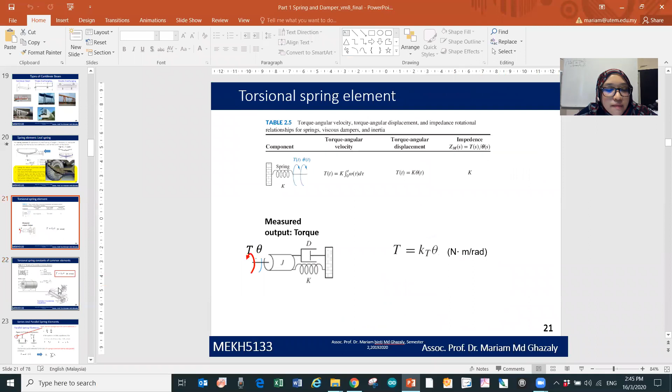Okay, welcome back. Okay, 6 students, any more? 3 more students. Not in yet. Who's here? Zamzame, Sadiq, Ain, Arif.

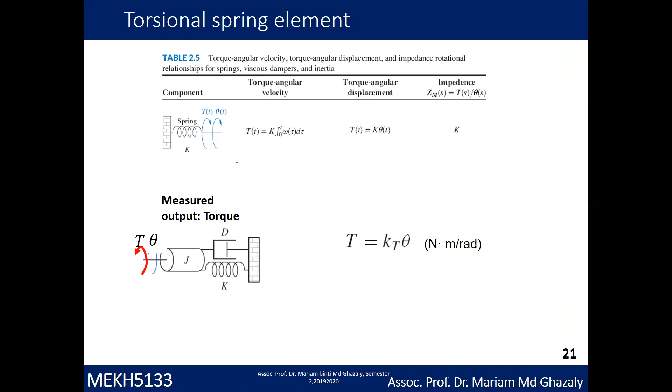Okay, torsional means the rotational part of the spring element. So you have the spring, but you're going to rotate it. So according to the table just now, you have the spring. You can get the torque value, which is equivalent to the K of the spring times the angle.

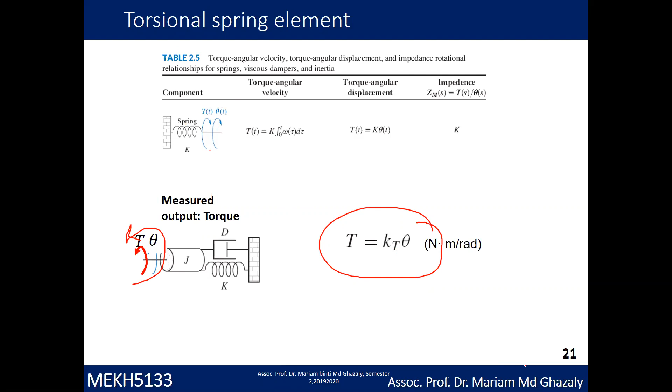And then for this one is the common torsional spring constant. Supposedly, as you know, the normal equation is T equal to K theta. But for the case of a coil spring, you use this equation. So KT is equal to E, the elasticity of the material, D to the power of 4, D is this diameter, over 64 N D. Okay, so this is the common equation. Of course, you can try to derive it if you want, but no need, okay? Because we have a lot of things to derive later when you do the dynamic system.

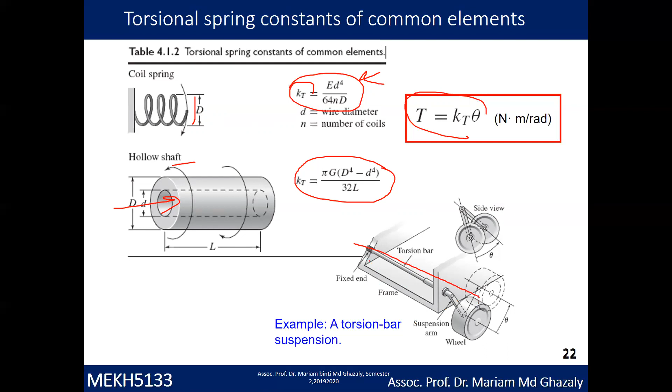And then for the case of a hollow shaft, meaning you have a shaft that is hollow inside, okay, you are given by this KT value, right? So where do you use this hollow shaft? Example, in a torsion bar suspension system. So you have the hollow shaft here, right? So next we go to...

...the series and parallel spring element. Okay, so we go through the first part, which is the parallel spring element. So we start with the modeling of the spring, without the mass value, right? So you have force here. Okay, you're going to give the spring force, and there are two springs connected in parallel. So you have spring with K1 and spring with K2. So the equivalent is that you have force and KE value, which is the equivalent of these two springs. Okay, so note here that the parallel springs have the same deflection X.

So either way, if you have two springs like this, okay, you push it downward, you will have the same deflection X. Okay, so it means you can derive the X value using the equation F equal to Kx. So you get X equal to F1 over K1, which is equal to F2 over K2, because X is the same here. Okay, so if the system is at static equilibrium, then you have F equal to F1 plus F2.

Okay, meaning you have two forces, which is the summation of F1 and F2. So you derive it here and get K1 plus K2 in brackets, times X. So therefore, you can calculate KE, which is K1 plus K2. Meaning that if you have two springs in parallel, you can directly calculate KE as K1 plus K2. So if you have three springs, 1, 2, 3, then KE equivalent is K1 plus K2 plus K3.

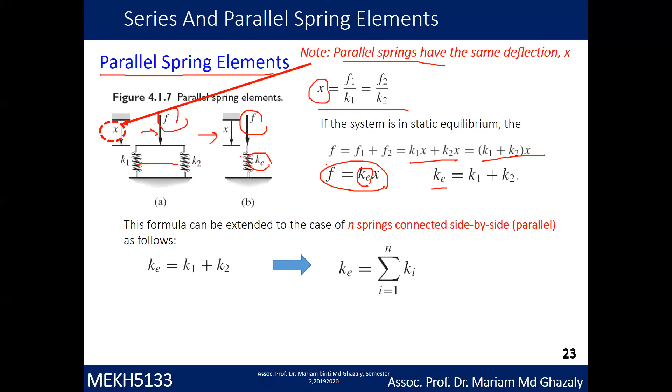In contrast, if you have a series of spring elements, like two springs connected in series, and you push it while one end is fixed, the spring will deflect and shorten by X. Note that springs in series have the same force value, so the force given to both springs is the same.

Therefore we can write X equivalent to XA, which is for K1, plus XB, which is for K2 deflection, assuming that XA and XB are not the same deflection.

If the system is in static equilibrium, we can write X equal to X1. What is XA? XA here is F, same F value, over K1, plus XB, which is F over K2.

So if you organize the equation again, you get 1 over KE. The K value, 1 over KE, equals 1 over K1 plus 1 over K2. This means for springs in series like this, you can get the equivalent equation using this formula.

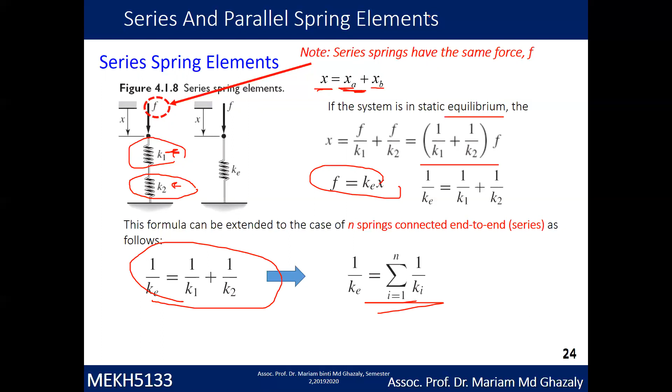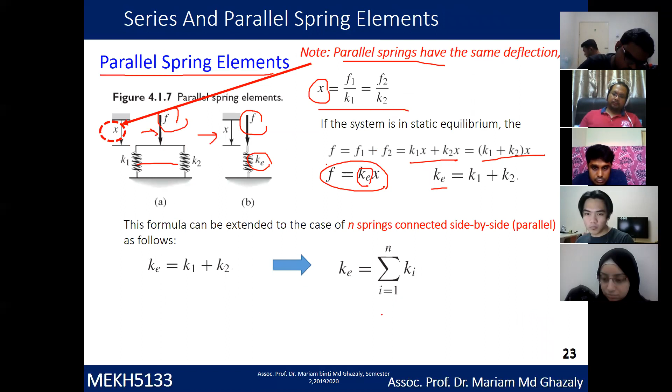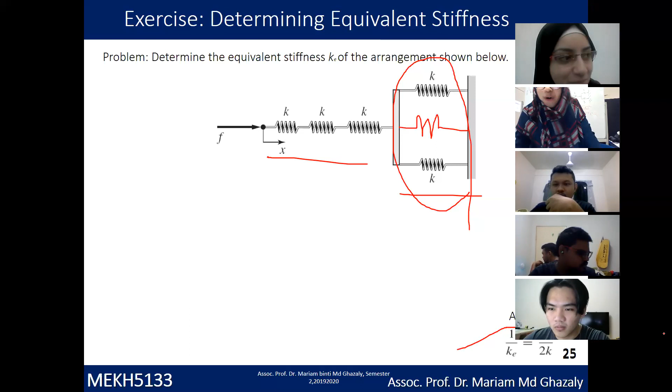What? Anyone? I heard a lot of voices. Anyone talking there? No, I'm just in the library and there's many people. Oh, in the library, alright, okay.

Alright, so first get the equivalent here for the parallel springs - you get KE here, which is 2K. So I draw this again: K, K, K in series, and then you have this K equivalent here, 2K. Now you can see that all this spring is in series.

So by having that, you already know based on the previous equation that 1 over KE is the summation of 1 over K. So you have 1 over KE equal to 1 over K plus 1 over K plus 1 over K plus 1 over 2K.

So you get 7 over 2K. So this is the answer. Of course, if you want to get what is KE, then KE is 2K over 7. Alright, so everybody okay?

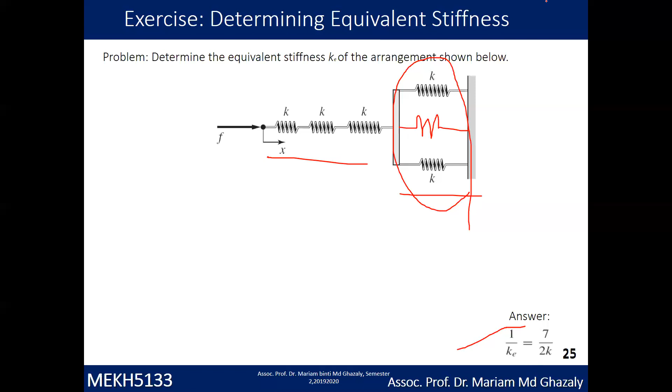Next, we go to this one. Determine the expression for the equivalent torsional spring constant for the stepped shaft shown below. You already learned in the previous slide that even a shaft is actually a spring, a torsion spring. So find the value for KT equivalent. For this one, just use the same method. This is easy.

Here you have K and K. We take it as K1 and K2. So find what is KTE. Is this series or is it parallel? Series. For series, the equation is 1 over KTE equals 1 over KT1 plus 1 over KT2. So what do you get?

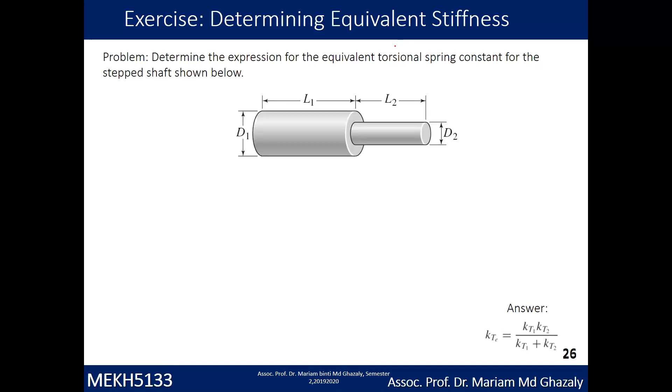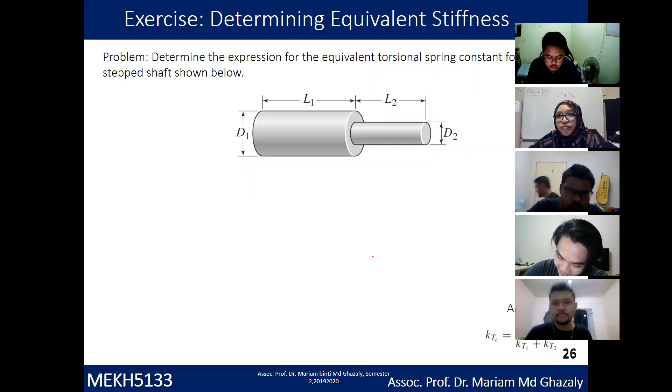Next we go to the modeling of mass and spring. Just now was only spring, so now we are going for mass and spring. Same table as just now. As you learned in last week's class, you can represent the spring force as equivalent to Kx.

Can I please see the solution on the whiteboard? Okay, I just need to write it down. Anyone else have any question? Not bad doing online class. The best part is that I'm sitting. Hiba, okay? Finish? No? Which part you don't understand? Wait a minute. Oh, my writing is very bad. Okay, done.

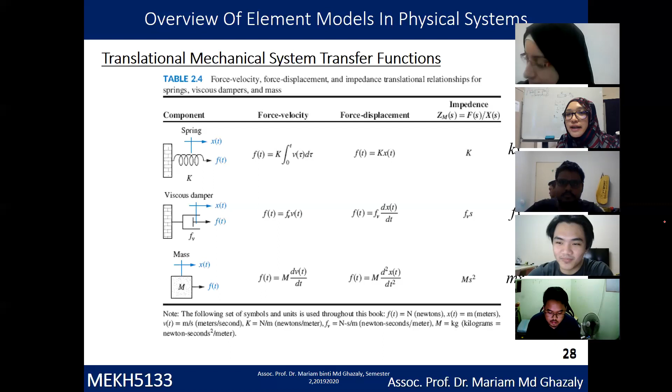The table here shows the value for the spring, f equals Kx. For the damper, f equals fv x dot, which is the differentiation of the displacement, so f equals fv dx over dt. And for mass it is m x double dot, meaning m d squared x over dt squared. We are going to use these terms for easy derivation in the next slides. So let's go to the first example of a mass spring system.

You have mass here. First step is draw the free body diagram. You have M and the K value. Then you have the force at this point, and x is the displacement of the mass. The equation from the free body diagram is M with displacement x(t), so m x double dot plus kx, equivalent to the force. So you get the transfer function for this equation.

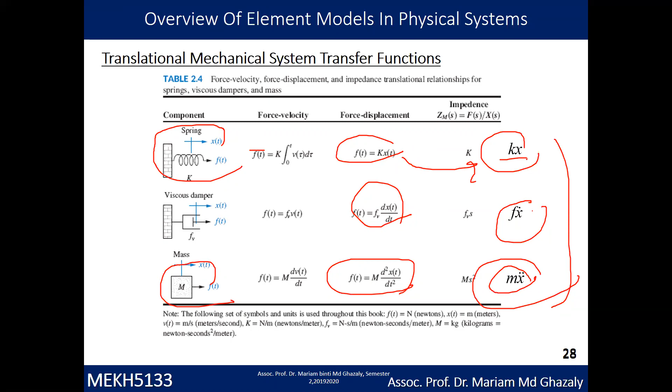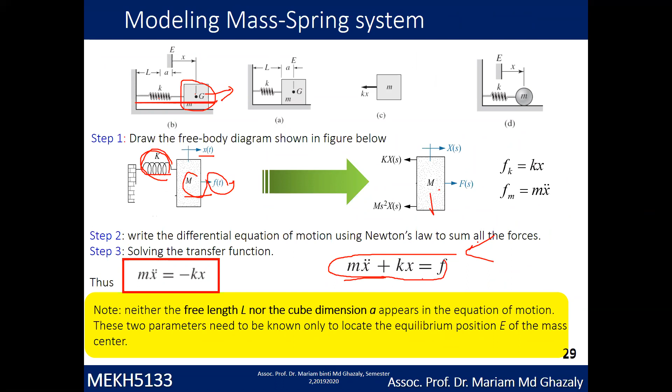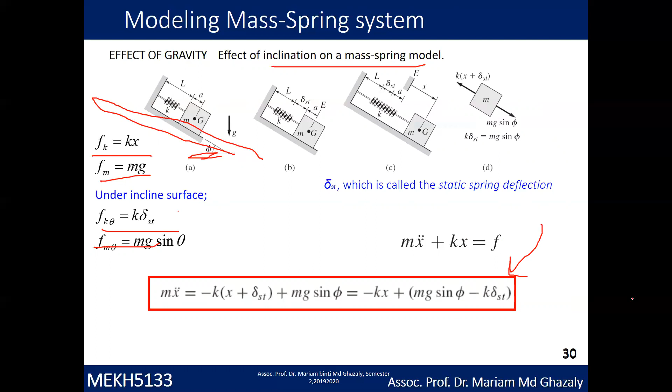Next we go to the static deflection in mass spring. Now it's not on an inclination, it's not horizontal, but it's in the vertical position, like this. Oh, the wrong way. So you have spring, pause. So if you write this out using the same concept as the inclination just now,

you have Fk equal to Kx, Mg equal to Mg. And Fk delta is K delta, meaning the deflection due to gravity there. So you will get Mx double dot equal to minus K(x plus delta st) plus Mg. It's without the theta. Just now you had mg sin theta, now it's only mg, right?

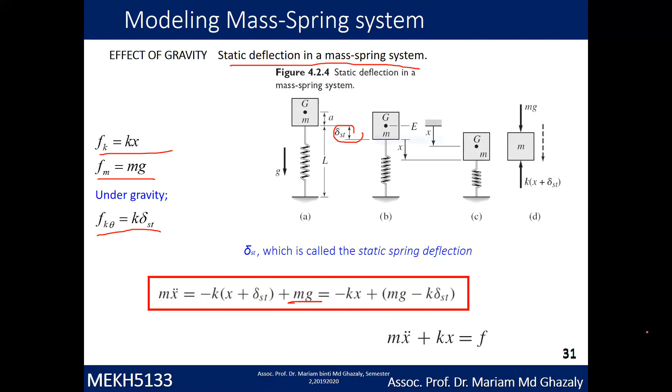So let's go to a real example of beam vibration. You already learned that a fixed beam represents a spring. So this one can be drawn as this free model: you have mass and a spring underneath connected to the fixed part here. The K value for this beam is given by this, which you learned in the previous slide for the fixed beam type.

Assume that the beam mass is negligible compared to M, so that the beam can be modeled as a spring. In reality, the beam itself has a mass, but to represent this model we only take the mass M. So the beam does not have any mass, but we represent it as a spring K. Determine the natural frequency of the oscillation.

You know that when you drive on a flyover, you will feel vibration. So calculate the natural frequency of the oscillation of the system. You know that the period of oscillation is 2 pi over omega n, and omega n is the square root of K over M. Substitute the K value here, then you get omega n for this oscillation.

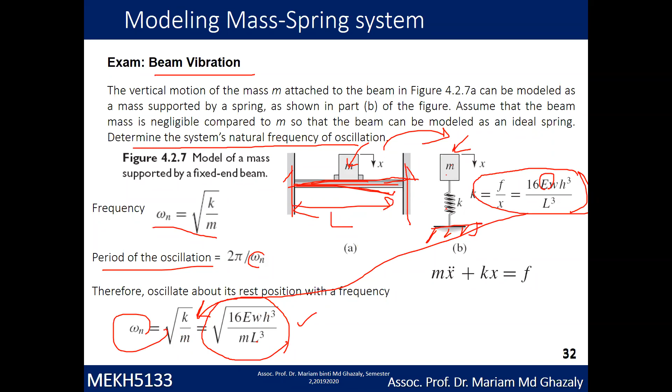Next, we go to the modeling of inertia in rotational mechanical systems. Similar to the linear system, where you have F, for the rotational system the output is T, torque. For the spring, torque is K theta. For the damper, torque is equal to D, the damping value, times d theta over dt, or theta dot. And for inertia, T equals J theta double dot, right?

So let's assume a torsional spring system. You have a mass here, the inertia, and this is the spring. You have learned that a rod actually represents a spring because it will rotate. So we have an inertia and a spring connected to it, represented as this value.

So find the torque T. Use the same concept as when you modeled the linear mass-spring system just now. So T is equal to I theta double dot plus K theta, equal to torque. How you get that is: you have a mass connected to the spring.

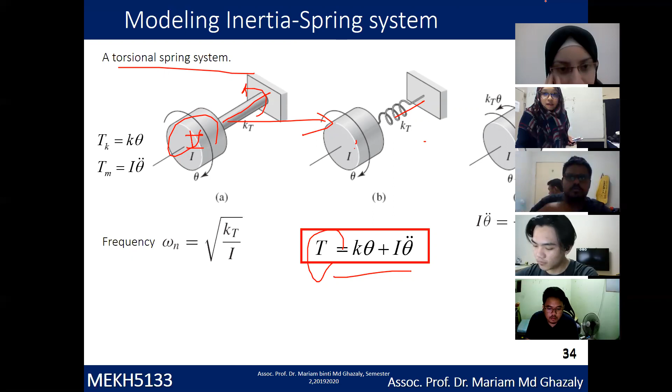Okay, so you have this one inertia and this one is the spring. This is representative. Okay, so you have the torque. Find what is T. Okay, similar to the mass just now. Start with I value. So I theta, when you have torque, when you twist it, then you have a degree of angle. Okay, theta. So I theta double dot.

So where can you use it? So you have inertia here. Inertia. Oh sorry, this is wrong. I typed wrong. I theta dot. This is I, not M. I theta double dot. So you get I theta dot. What else is connected to the inertia?

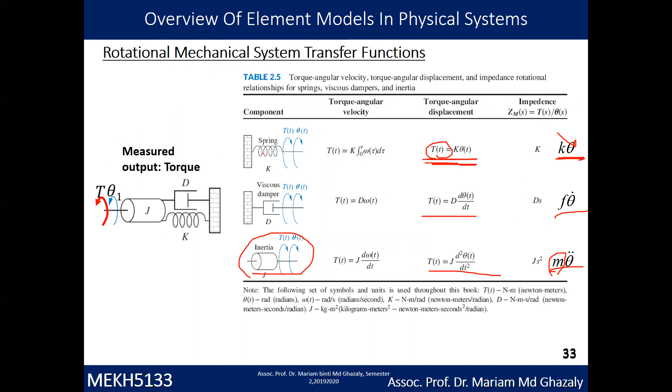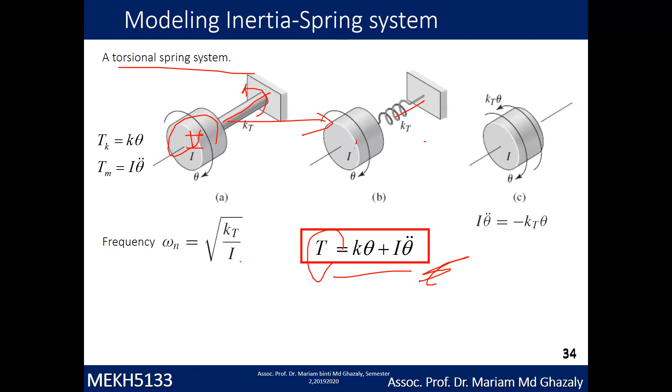K value, K theta. So you see here you have K theta for spring value. Okay. And equivalent to the output. The output is the torque value. So equivalent to T. So that's why you get this equation. Right? So here is just to give the frequency, omega n, which is given by kT over I.

And this one is an example of cylinder on an incline. So it's similar to what I explained just now. When you have a mass system, a linear system on inclined motion, then you can actually get the equation as this one. Okay, so you have the mg sin theta at this part, and then you have mg cos theta at this part, moving to this part. So that's why when you write out the differential equation, you can get this equation.

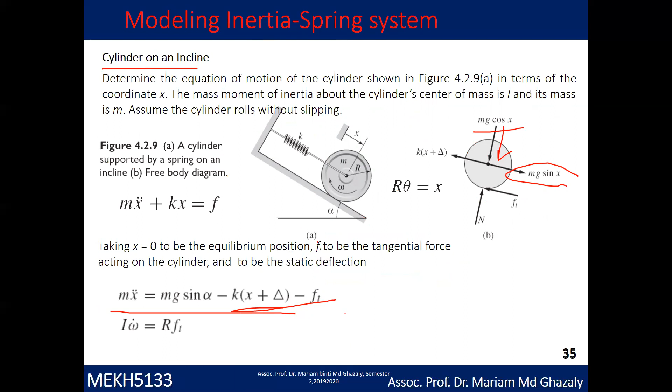Okay, you just try this at home and try to derive it. Because I need to speed up a bit. If not, we don't have time. Okay, next, let's go to this slide, slide 36.

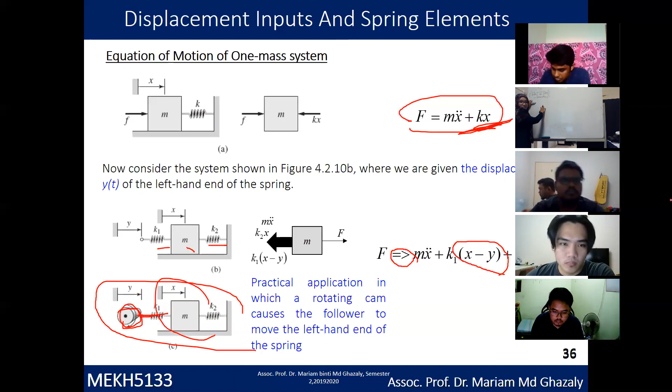Oh, I have to take this one. Can you see this? Yes. I'm not sure if you can see it. This. Boleh nampak? Boleh.

Okay, this one is the example here. We have one mass, we have K1 and K2. K1 is connected to this end, and then this one is actually the cam and follower. So this K1 is actually having a displacement of y, and this mass is having its own displacement of x. So find the transfer function.

So we start with the same concept of when you have one mass and one spring value. So start with m. What displacement is connected to it? Which is x. So you can write it as m x double dot plus what else is connected to m? K1 and K2, right? We have plus K1 x. K1 is connected to x also. If we have the displacement, K1 will also displace, plus K2.

K2 x. Okay? Equivalent to, and normally what you have here is the force value, right? But we don't have any force value. Force is 0. So we have 0 plus, look at this system. Because you have two displacements here, x and y. So y displacement will be the force part here. So we have K1 y.

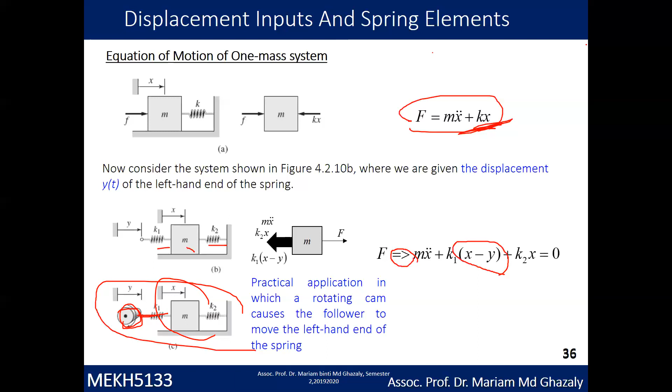So if you rearrange this, you have m x double dot. In the equation, rearrange it, bring this K1 y here. So you have K1 times x minus y plus K2 x equal to 0. Okay, so this is the transfer function for this system. Everybody follow? Yes. Okay.

Let's do this very quick. I only have 5 minutes before the time is up because 40 minutes already passed. So next is 2 mass and K1, K2. We have x values, x1, x2. Okay, so verify the equation of motion, get the equation.